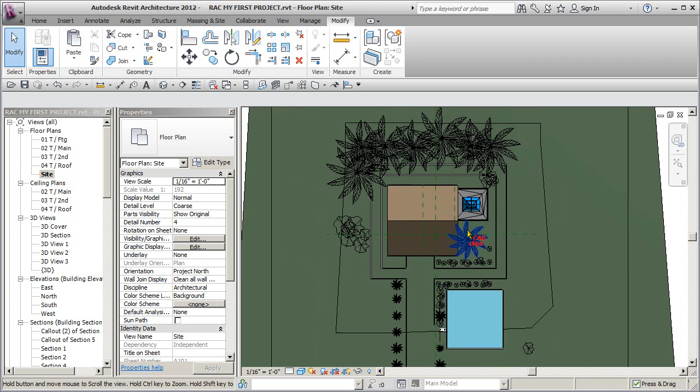Here we're going to talk about a subregion. We're just going to recreate that subregion I deleted earlier somehow. So let's go to our site plan again, double click, and there's the area we want.

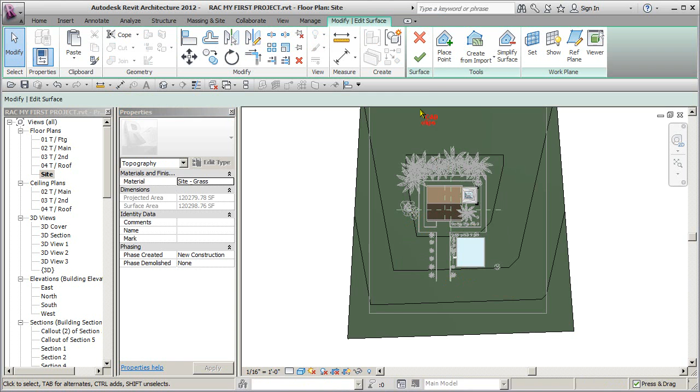You can see by my new Topo surface that this curb isn't sticking up, which means I think let's pick on here and edit this one more time. I'm going to take these two points and make them -6 feet. All of a sudden this wall is going to show up. Isn't that interesting? Okay, makes more sense. So that added a little bit of slope there.

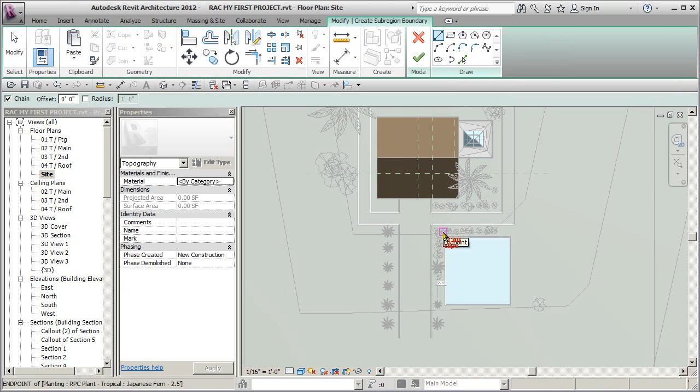So now I want to go to my massing and site, and I'm going to create a subregion. The subregion will be part of the main topo and follow the contours. So we click on here, and now we need to just draw the line work. I'm going to use the line work tool and pick the inside of these walls. Last time I did it the opposite way, where I did the walls after I did the subregion. Now I'm also going to do something in here at the same time.

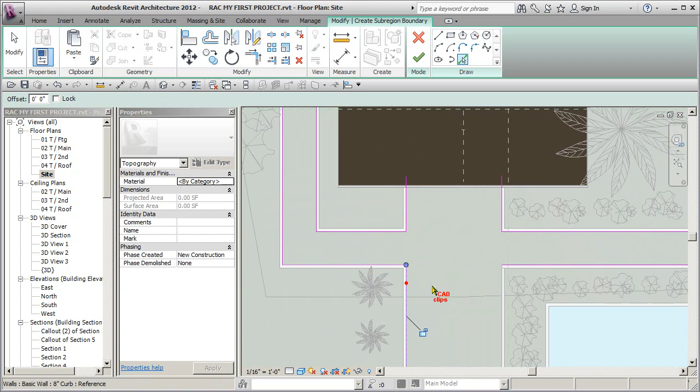Why don't I do that while I'm here? Good idea. Okay, because I've got to create a little bit of a driveway there. So I'm going to pick these points, and then draw a line from here to here. It's got to be a closed polygon. Another line from here to here.

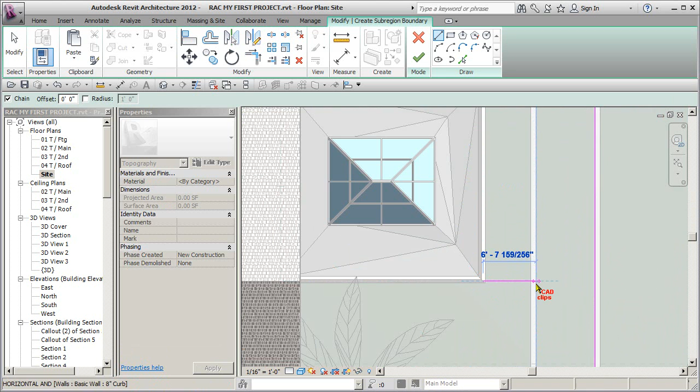I'm hitting escape in between, panning over. And in here, I'm going to do this. Panning over here. Now that is to the edge, to the core of the wall. That looks good. And then go back and pick here. Then do a quick split in the middle, and trim these edges.

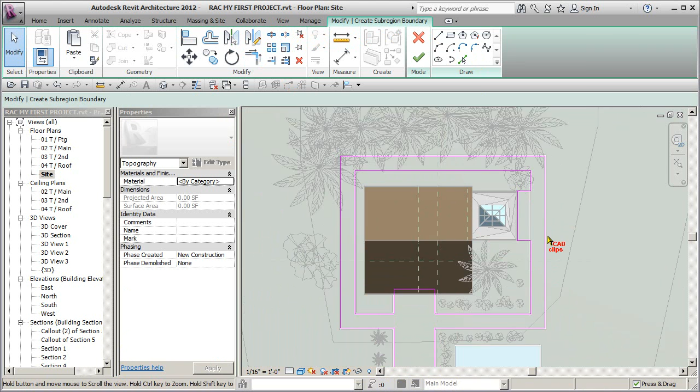And a last pick of this edge. Pick, escape, escape. Okay, so there's my closed polygon, and I want to set my material to be site asphalt. Down we go, site asphalt. Looks good. Finish. Lines cannot intersect.

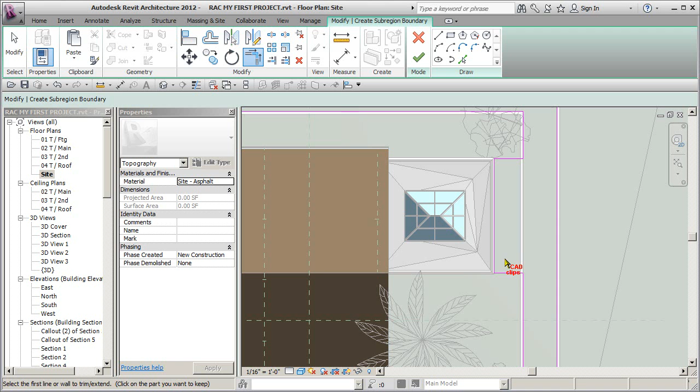Oh, we've got a little problem. Continue. Yes sir, oh, we've got a little overlap in there. Trim, trim, trim, trim, trim. If it doesn't give you the option, it means it's already filleted, trimmed. Okay, that's good.

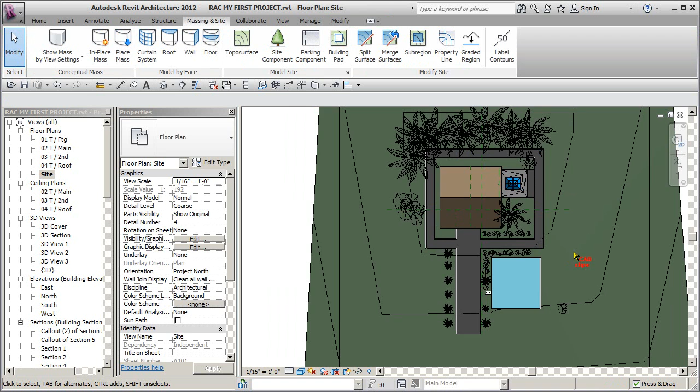Finish. Oh, another little trimming problem. Continue. Okay, so if it isn't trimmable, then it won't highlight the line. That's one way of finding out. Oh, there we go, click out. Ah, that's better. 3D view, cover sheet.

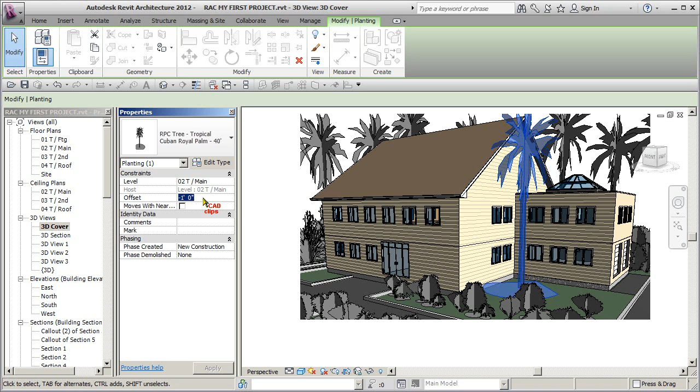Now we're back to where we were. You see this tree sticks up a little bit. We can always bump that down by a foot and just kind of get rid of that. Oh, wrong way, I wanted to go -1 foot. I did go -1 foot. -2 feet.

Ah, there's another point. My trees are no longer hosted to my topo surface. So let's do that. You see, I deleted my topo surface, and then what happens is these guys lose their association. So watch what I'm going to do.

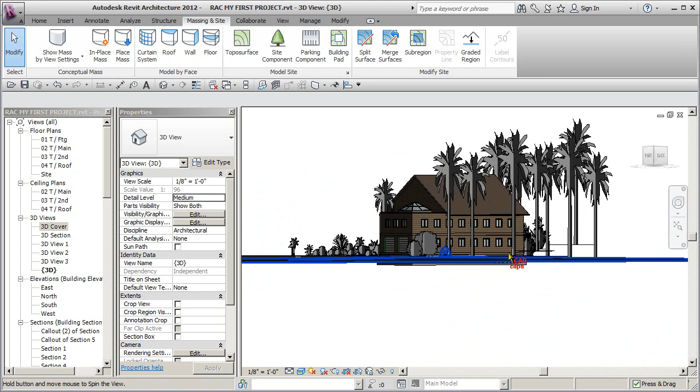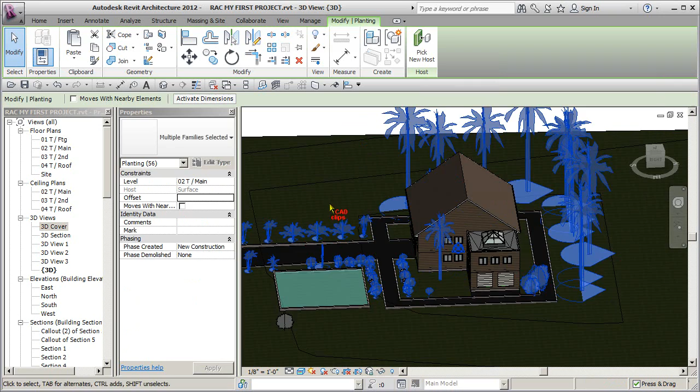I'm going to go like this, do a crossing selection. I wonder if I can just do everything. And then I'm going to use a filter and say only the plants here. And then I'm going to pick new host. Pick. There, now they're back talking to that topo surface again.

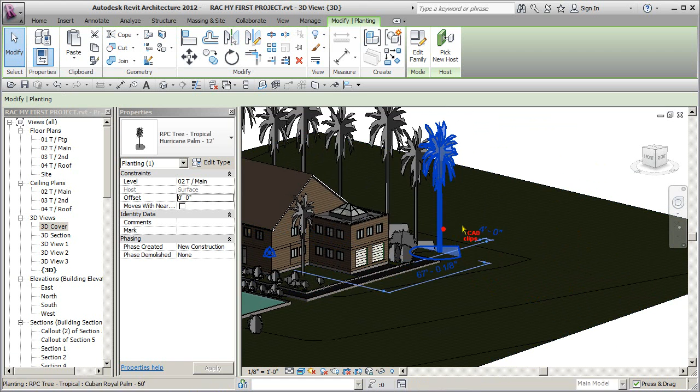That's a very good point. Now we're all good again. Okay, now these guys are all back talking to the surface, because if you change the surface, the plants in that will follow the terrain. If you provide a low point or a high point and you place a tree or slide it along, it follows the grade as you move it.

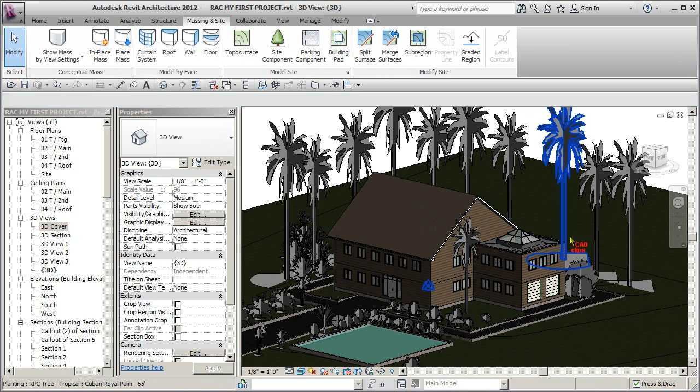So if I grab this guy and drag it over to here, it's going to stay down low. If I move it over here, so plants follow the topo surface once they're hosted by it. Okay, windows are hosted by a wall, trees are hosted by topo surfaces. So topo surfaces and walls, etc., sit higher on the element chain.

Back to my cover sheet, and there we go, all is good again. Let's just switch over to realistic view. And we are almost ready to render again.